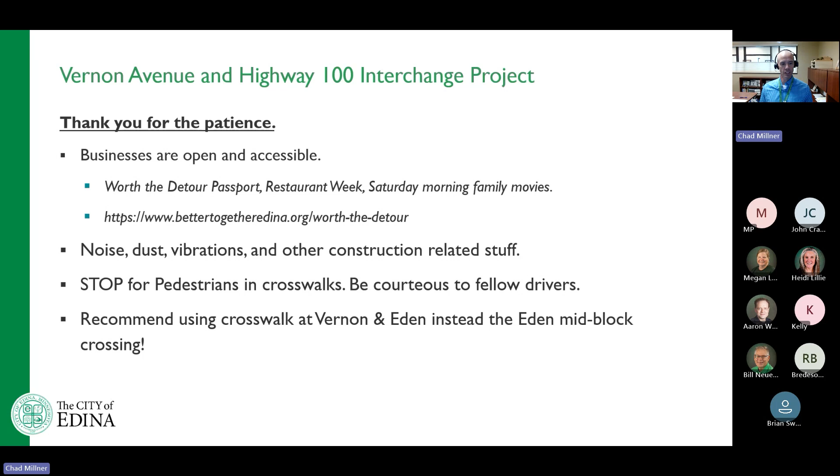Stop for pedestrians at crosswalks. We're still getting comments on that. Be courteous to fellow drivers, let people sneak into those roundabouts from a different leg of the intersection, at any of the intersections with roundabouts. And again, if you're not comfortable using the mid-block crosswalk on Eden, we recommend using the fully controlled crosswalk at Vernon and Eden instead, where there's a traffic signal.

Goals of the project, again: improve safety and mobility of all users, create separated pedestrian routes, improve traffic operations, and all the other ones listed here. We've been looking at these for every meeting.

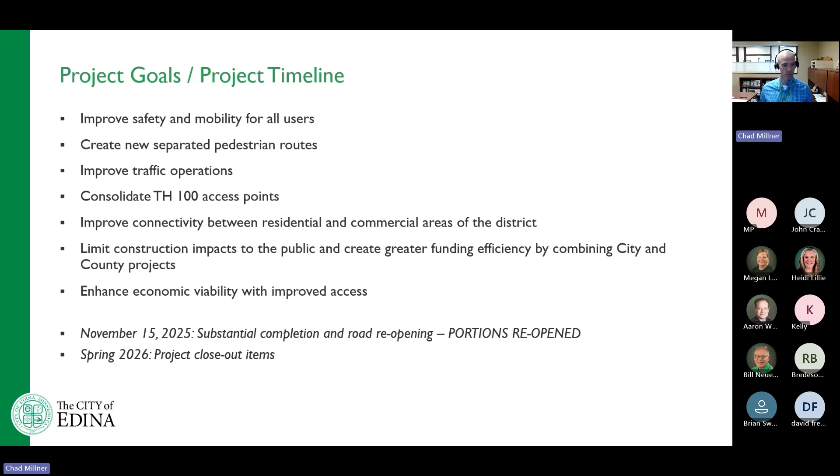Schedule-wise, November 15th of this year is the substantial completion date in the contract. Portions of the project will be reopened, specifically around Highway 100. That portion is going really well with the contractor. There'll be some work in the spring for closeout stuff, but we don't know yet on the Vernon Bridge. I'll give an update on that real quick.

This is the project. It starts west of Interlachen Boulevard, includes the intersection of Interlachen and Vernon, the Vernon Avenue Bridge over CPKC Rail, the Highway 100 Bridge that carries Vernon and 50th over Highway 100, and the on and off ramps, cleaning those up. The project ends just west of Grange Road, where the city had a project last year.

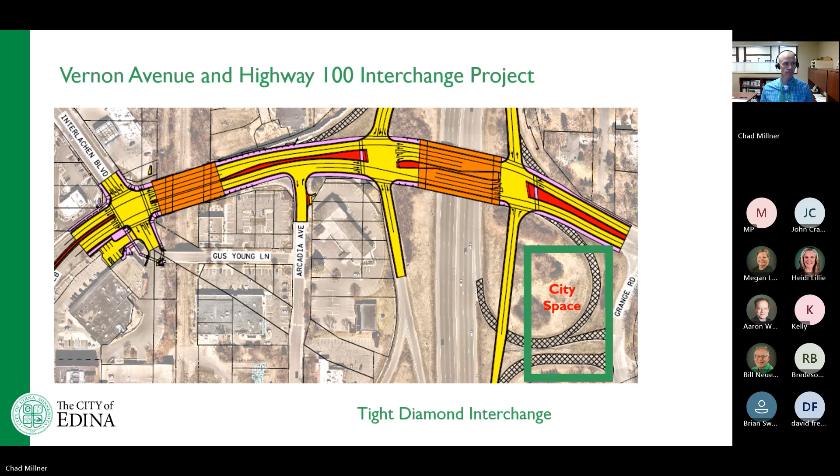Lots of different ways to get communications on the project. We're at week 13 of these meetings. We do these every 2 weeks, but there's all sorts of other stuff that goes out every time we do a detour update. The best spot to get project updates is

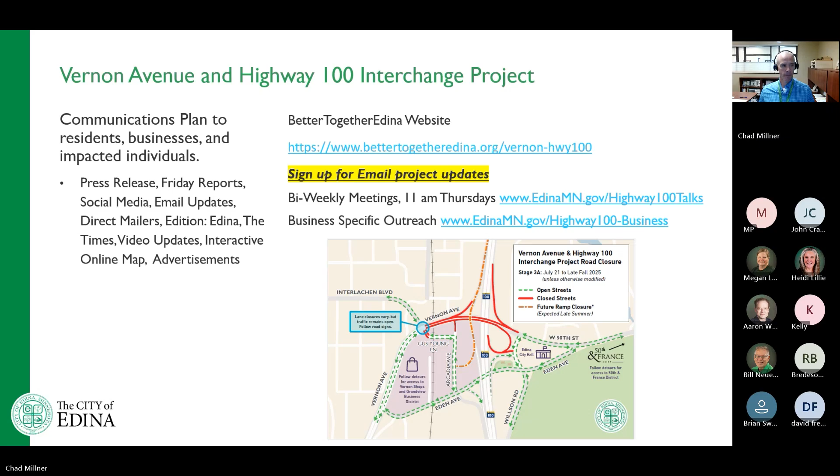There are ways you can support the businesses in Grandview and 50th and France this fall. There's the passport program I talked about, a loyalty program where you collect stamps when you shop and dine at participating businesses, then enter to win gift cards at your favorite local spot. We want to thank Explore Edina for purchasing those gift cards for the drawings. You can also do Restaurant Week, a social media contest, and free family-friendly movies on select Saturday mornings at the Edina Theater. Check out all the details at bettertogetheredina.org, Worth the Detour.

Construction details: this intersection, Vernon Avenue and Interlachen Boulevard, is free-flowing. It's been that way for quite a while. Majority of the work is complete.

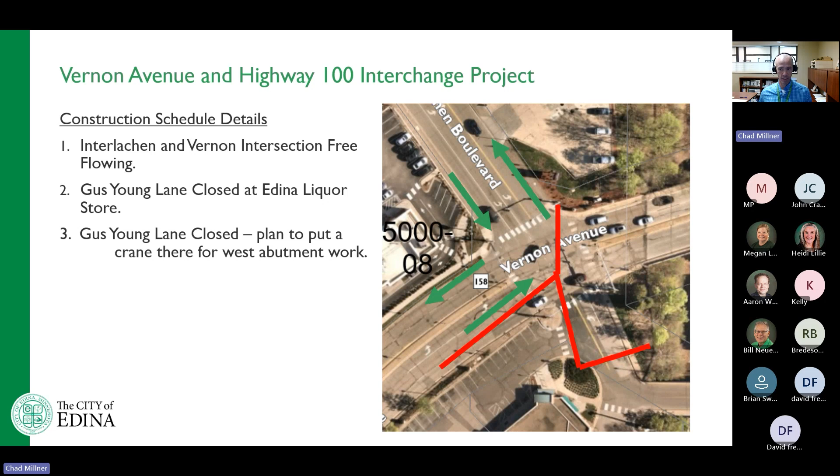Gus Young is still closed in that area, and it plans to be closed because we need equipment and a crane there to start work on the west abutment. I can say we are getting very close to that actual date because there's been a lot of conversations, but officially we haven't seen it yet.

That last bullet point relates to the power line that's horizontally and vertically different, which was hit in May. Since Monday, CPKC Rail has stated the permit has been issued. Xcel Energy, who needs the permit and won't move forces over here to do the work until they have it, has been stating they have not seen it. So these two parties are, again, one says it's been issued, the other one hasn't got it.

We are just waiting to have Xcel state that they have got the permit, and then they've promised to move a crew over to this site within 72 hours after getting that permit, so they're going to expedite the work. We want this work to start next week, but until somebody at that organization sees the permit that the rail company says exists and is approved, nothing's happening. So I'd like to say I'm surprised, but I don't know if I am.

We're hoping to have work starting out there next week. Hence, Gus Young remains closed. Equipment going in and out to start doing the removals, the relocate, and the conduit to hold this new power line. Then after that is all the work that should have been occurring over the last few months.

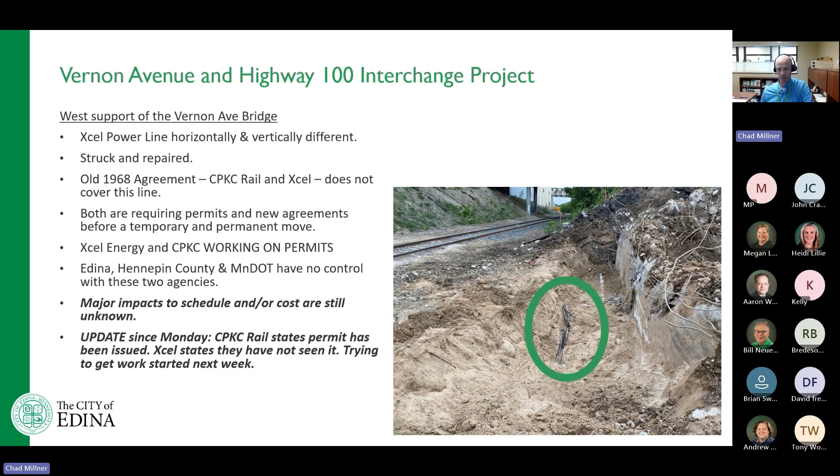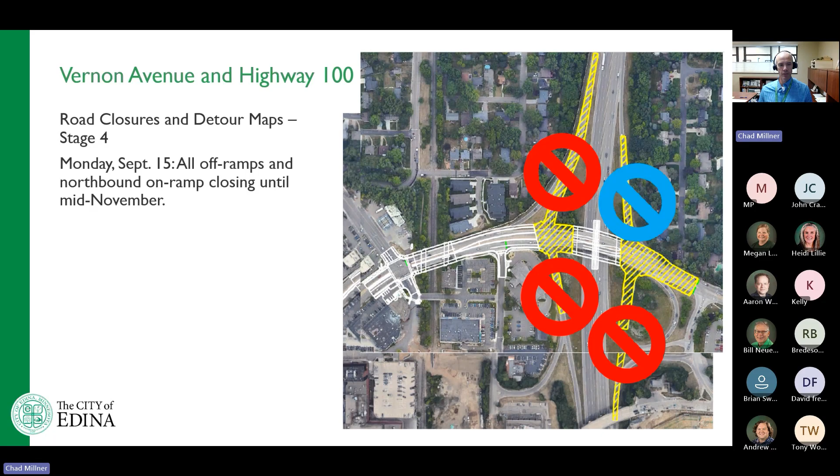Detours. This was the big thing at the beginning of this week on Monday. The last 3 off-ramps closed on Monday, so we saw a lot of change in traffic in the area, and we're continuing to monitor impacts related to these final closures.

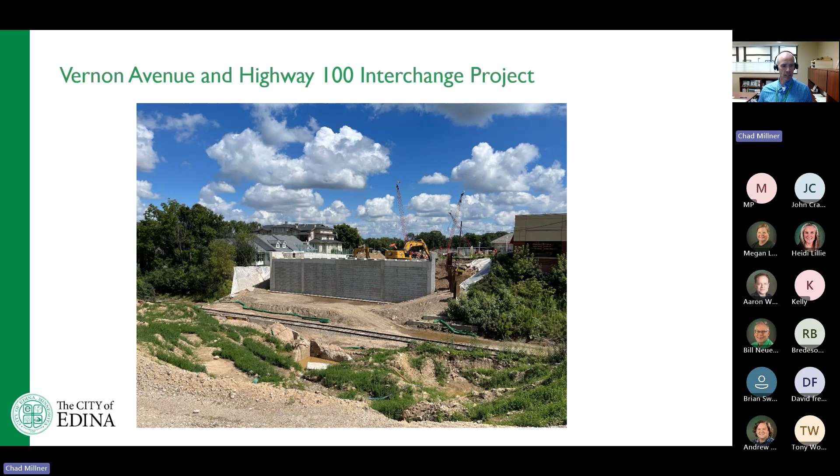Hope to see some equipment in this area starting next week to move the power line, with Ames Construction starting the work on this area.

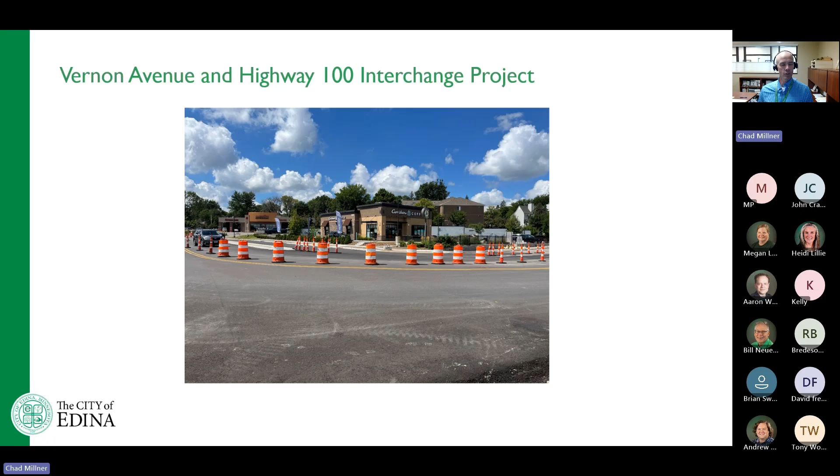Interlachen and Vernon, nothing's changed here. It's still a free-flowing corner and traffic is moving through there nicely.

Noise wall along Hawthorne Court continues to keep being poured and built and moving forward at that location. Not a lot happened since our last meeting at this location.

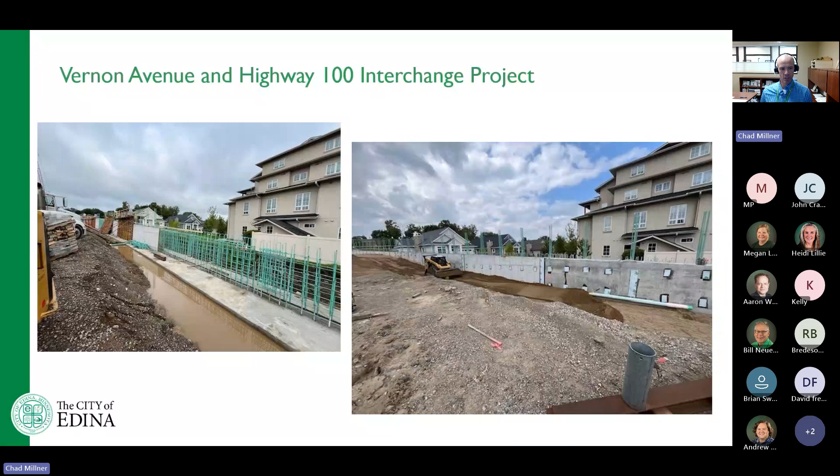The bridge girders or beams over Highway 100 were fully placed since our last meeting, so those are in place. The picture on the right starts to show them forming to do the deck pour, the concrete deck pour.

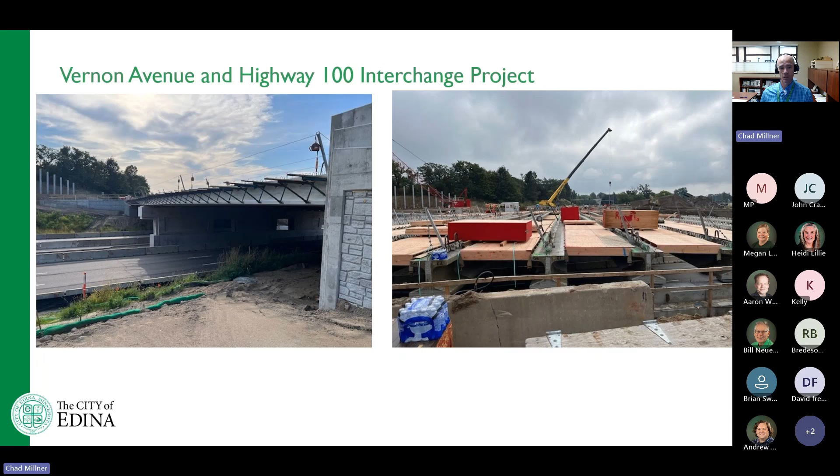Here's what it looks like as of 2 days ago when I took a picture. Those forms are nearly complete. You can see they're covering that whole structure around the beams to be able to pour concrete over this whole structure. They intend to start doing that late next week.

It'll be night work over a couple nights. They have a couple nights planned. I don't know if they can get done in one night, but they will be doing that hopefully next week overnight and get that deck poured. That's a big progress spot for this bridge.

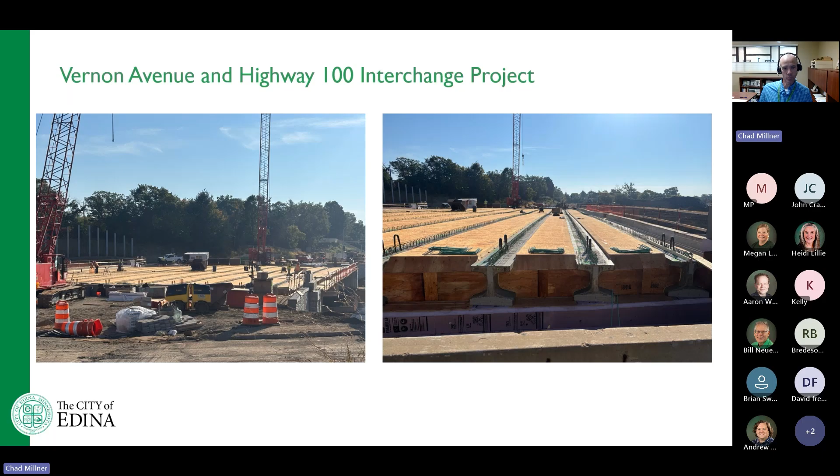The noise wall along the northbound on-ramp to Highway 100, the posts are nearly in place. This was again a picture from 2 days ago. These posts should be completed by the end of the week, and then the timbers that fill in between the posts are going to start going up next week. So this wall is taking shape.

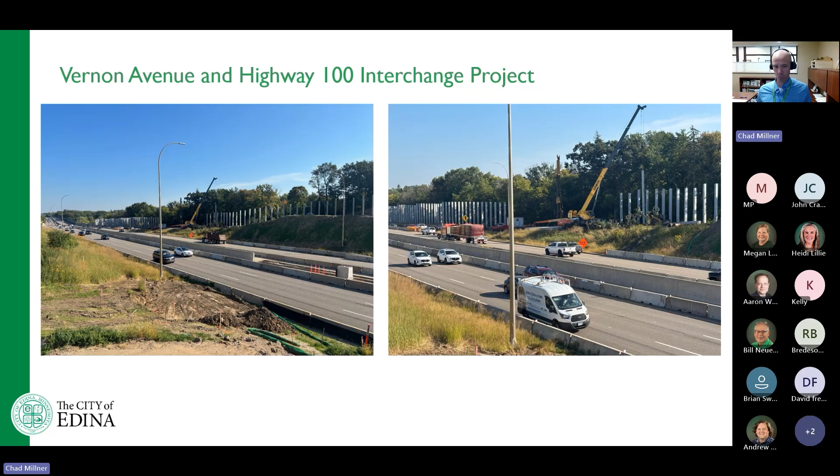And again, renderings of the finished product. On the left is showing the bridge on top, and below on the right-hand side is that bridge from the Highway 100 side. So with that, I'll stop sharing.

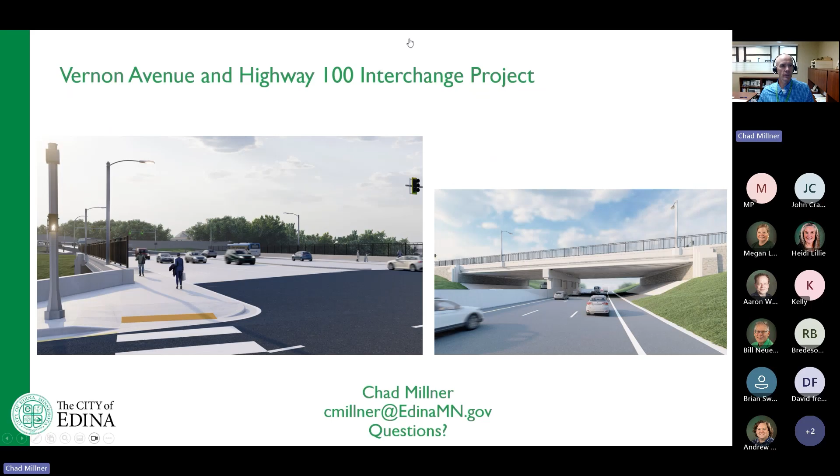That's where we stand today with the project. The big news is, should have a permit any day.